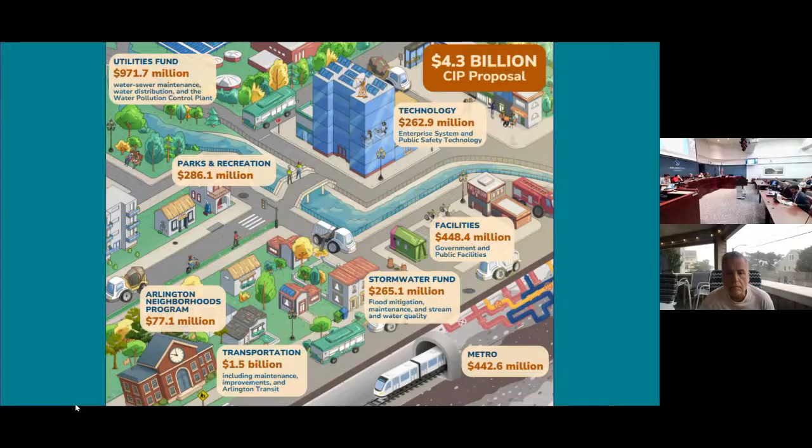We show this graphic just to highlight, it encapsulates all the various elements in the CIP, whether it's our water sewer to park and recreation to the neighborhoods program. This is the county CIP. Down on the lower left is the school, so it really captures all the main program funding areas.

So starting off with facilities, the county's real estate footprint includes 90 county buildings and over 2.4 million square feet, with about 1/3 of the buildings over 50 years old. So a lot of infrastructure to support and maintain, and keeping our buildings in good condition is paramount for the safety and comfort of our community and employees.

And of course, areas that you all are very involved in, some planning, whether that's on Langston Boulevard or Carlin Springs.

Next, we have transportation. The slide shows a snapshot of all the various things involved in transportation. The CIP provides resources to help us manage and maintain a safe, accessible, and reliable multimodal transportation system. The next slide shows the huge investment that the county makes in this area, totaling $1.5 billion, and that's excluding the metro commitments, which I'll highlight on the next slide.

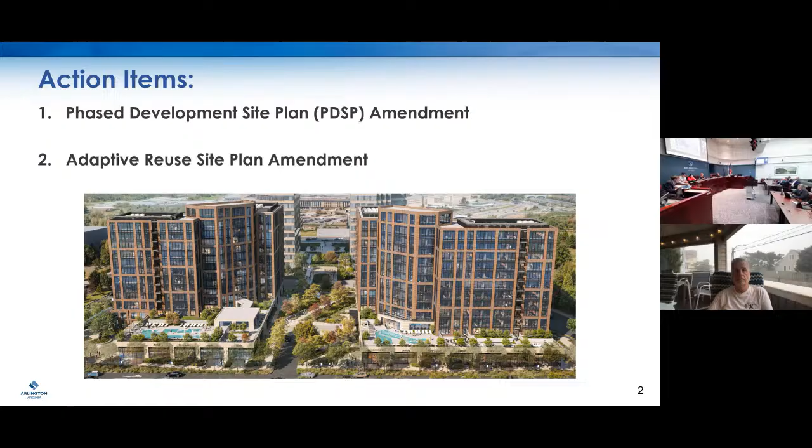I have 2 action items for you this evening. The first is a phased development site plan amendment, and the second is the adaptive reuse site plan to bring this development project forward. This site is at 601 and 701 12th Street South, just across the street from the Pentagon City Mall and the Pentagon City Metro Station to the south. This site is bounded by South Hayes Street, 12th Street, and Fern Street to the east.

The site today is comprised of 2 vacant 12-story office buildings constructed in the early 1980s. On the west side, or page left of the screen, is 701 12th Street South, and on the right side is 601 12th Street South. There were final site plans for each of those under the Pentagon City PDSP, also known as Pentagon City Block 1C. The zoning is C-O-2.5 Mixed Use Development District, and the GLUP is High Office Apartment Hotel, noting that we're in the Pentagon City Coordinated Redevelopment District, and there are no proposed GLUP or zoning changes with this project.

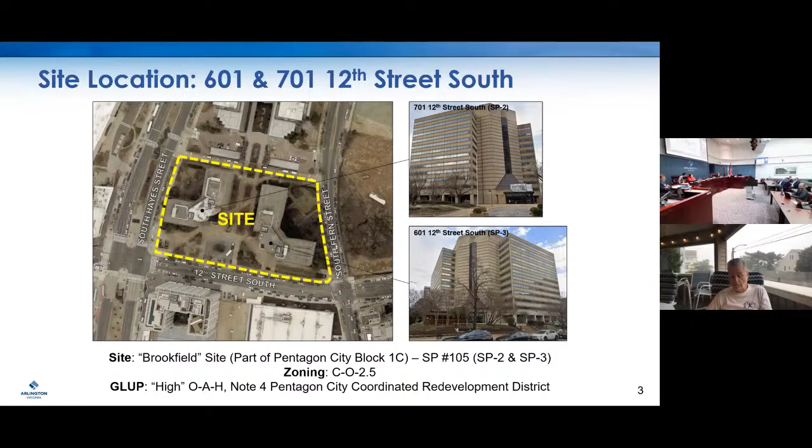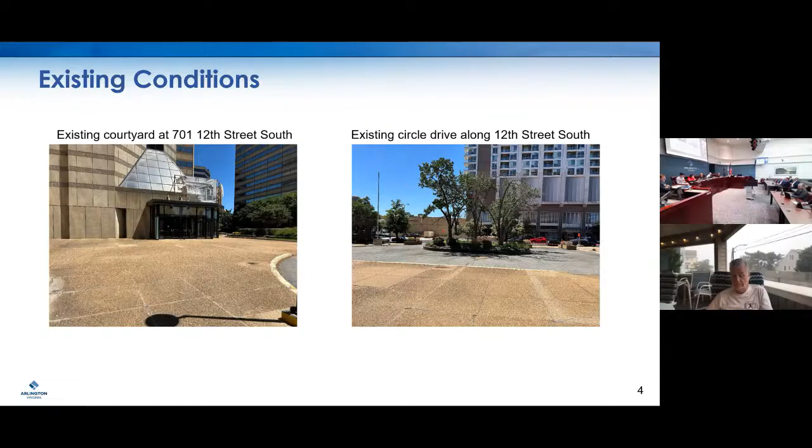Just 2 photographs of existing conditions from the ground today to keep in mind as we talk about this project. There's a lot of existing hardscape on this site today, surrounded by private courtyards and a large circular driveway fronting off of 12th Street South. One of the things I think will be very positive with this project is removing this - which I can tell you was very hot down there taking those pictures - and replacing it with retail fronting on 12th Street, increasing landscaping, and adding public access easements to make these spaces truly public.

So jumping into a little bit of policy guidance here - I will come back and refer to this as needed.

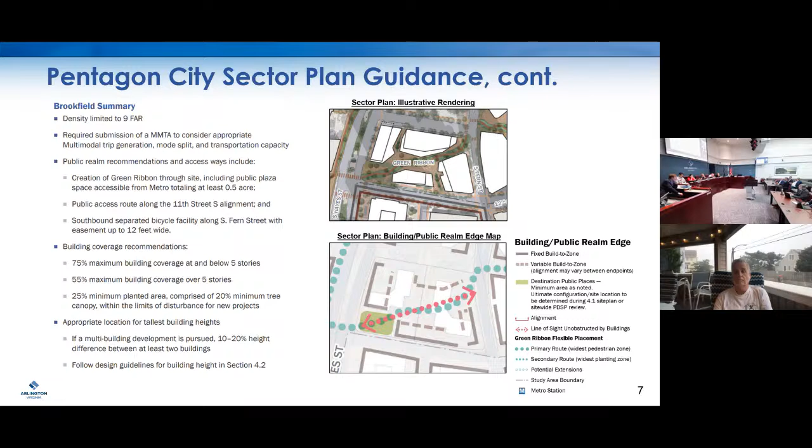I also would like to highlight our adaptive reuse policy, adopted by the board in 2024 in response to the declining commercial office sector in Arlington generally, and recognizing that chronically vacant office buildings have a negative impact on neighborhoods—whether that's the economics, the property values, or the public realm. Repurposing those vacant office buildings is a public priority.

Lastly, it recommends a streamlined review, which this project did go through. We had a lunch and learn meeting on May 28th, which was well attended, and we appreciate everybody for attending and providing feedback.

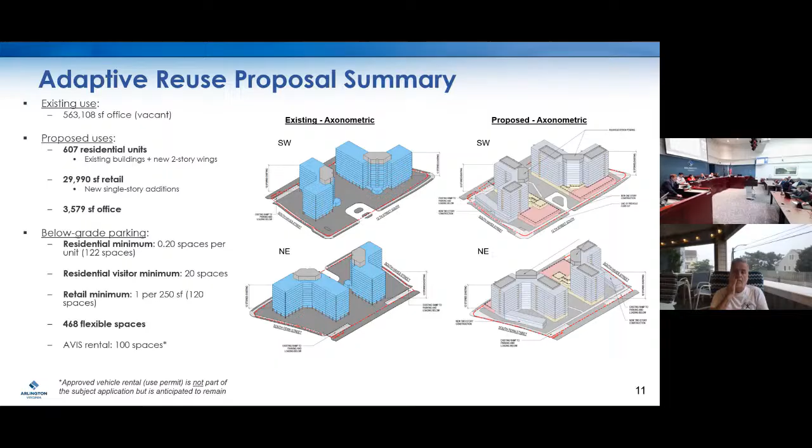Residential visitor spaces are also required, 20 spaces minimum, and retail spaces, 120 of those. The remainder of the garage is flexible use, essentially parking spaces we are not counting toward the required parking requirement. There's an Avis vehicular rental operation with an approved use permit by the county board that the applicant intends to continue operating there for the time being.

I'm Jeff Zell from Zell Partners. I'm the CEO and chairman of the firm, and we're doing this project with Lincoln Equities Group. Joel Bernstein is on the video, joining us from New York tonight. We're very proud to be here again. I've been in Crystal City doing most of Crystal City with Bob Smith over the years. I represented the family office and our own investments, which are over 14 buildings over there, including Crystal Houses. And it's kind of nice to come back and do a great project here.

We look forward to providing you with a very high quality transitional building here that I think will really set the corner. It's a very high-end building. We're removing the facade, as we'll explain, so you're going to get none of the issues with the windows that were described earlier. Arquitectonica is doing it, which has offices in Miami and New York City, but also an office here in Northern Virginia. So we're very pleased to have them on board. We think it's a great system, a great building.

We think we've given you a lot of park area. We try and listen. I will tell you, this has been the greatest collaboration between your staff and our company and all our different consultants that we bring with us, to provide you with what I think will be really a state-of-the-art transition of office to residential. So thank you for giving us the chance and opportunity, and I don't think we'll let you down.

Thank you, Jeff. Next slide. Madam Chair, if I could give a little color as a developer looks at the project, maybe give a deeper explanation on how we got to where we are. As Mr. Watson showed on that beauty shot of slide 4, it's pretty inhospitable today - it's a bunch of concrete 1980s buildings sitting around a sea of concrete.

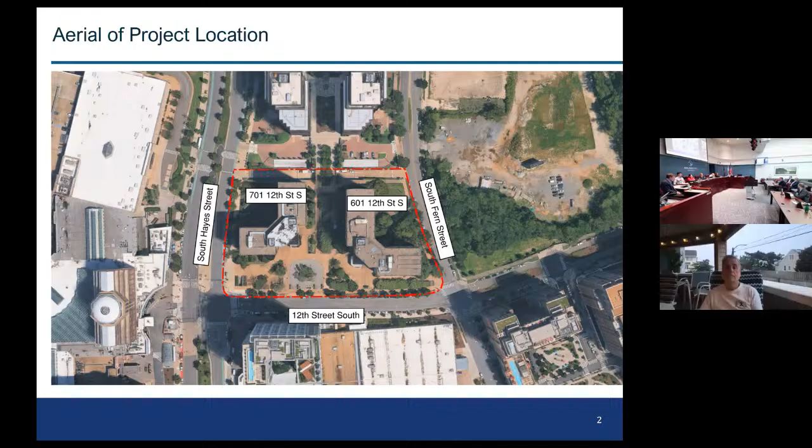Next slide. Jeff early on said, well, what can we do with the structure and the bones of this project? The good news is the core and thickness of this building is really an ideal conversion. When you get out of the hallway and open the door into the unit, it's just about the right depth for a residential unit. That made it structurally a very attractive project for both Zell and Lincoln Equities.

However, we still have the problem of the buildings being towers sitting in the middle of concrete. So early on, Jeff and his team said, well, we need some residential coupled with retail. You're seeing two approximately 15,000 square foot retail bays. Early on, our thought was to break up the open space - instead of having a half-acre park just on one side on Hayes, can we do two quarter-acre parks on both sides? That gives us a nice interaction and doesn't make a sort of primary and secondary. They're both equally proud buildings with strong amenities.

As you can see from the green here, while the entire site is covered with an 800-space underground garage, working with Oculus, we were able to couple the vision that the county has for the green ribbon with as much greenery and porosity as you can see through the site.

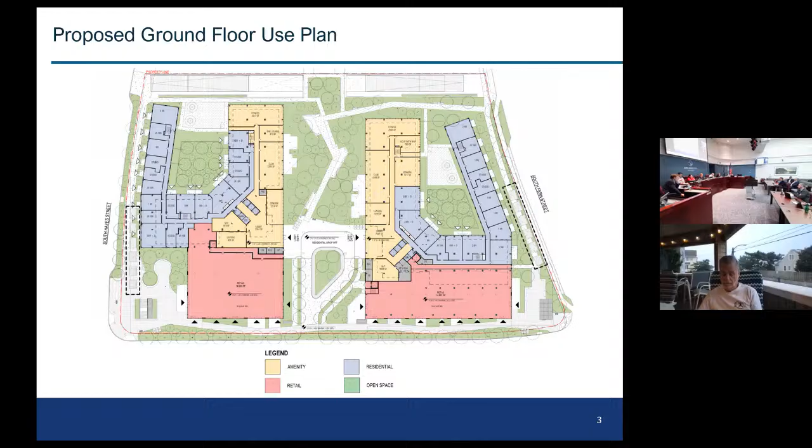I believe the next slide shows some of the public access easements through the site. What we're trying to convey here is there are 2 types of open spaces. For the community, the blue is you can go there whenever you want. That is a public access easement at the 2 parks on the eastern and western side, as well as a large central plaza in the middle of what was the green ribbon. I'm going to say it still is a green ribbon, it just zigs instead of zags.

Finally, the darker orange space, you shouldn't see a distinction between the 2, but it gets closer to the building than some of the building amenity spaces, clearly within the nooks of the 2 arms. On Fern and Hayes on the eastern side, the conversion ordinance allows up to 2 stories of additional square footage to be built on the project. This achieves a strong county goal, which is to bring the building out to the street face, so you don't have buildings on an island. You actually have doors on Hayes Street on the left-hand side.

The grade allows those units to walk straight out, which is great street activation. While we're not able to do that on Fern Street due to the grade, we are, as Mr. Watson mentioned, able to do the bike lane improvements along the entire frontage to begin building that bicycle network that the county's vision lays out.

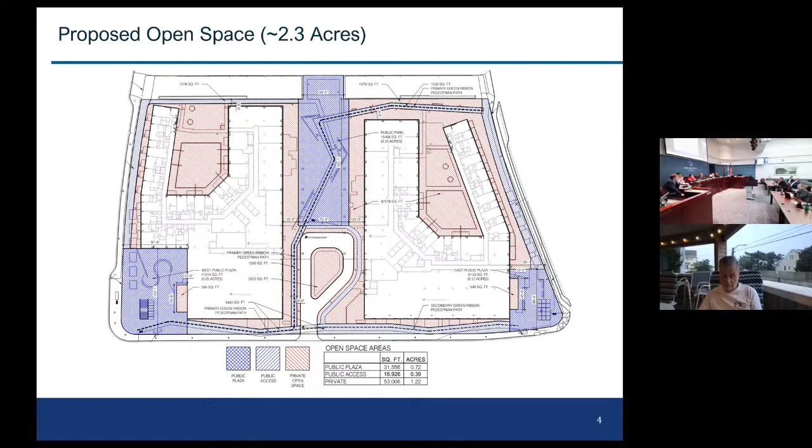These are some of the technical details, we can come back to that later, but it shows basically 35,000 square feet of proposed public access easements, in case there are any questions in the community about us not doing the best we can to get access through the site, and also along 11th Street at the northern end of the site. It's on a street because our entrances are there, but it does give that public porosity east and west along the northern edge of the property.

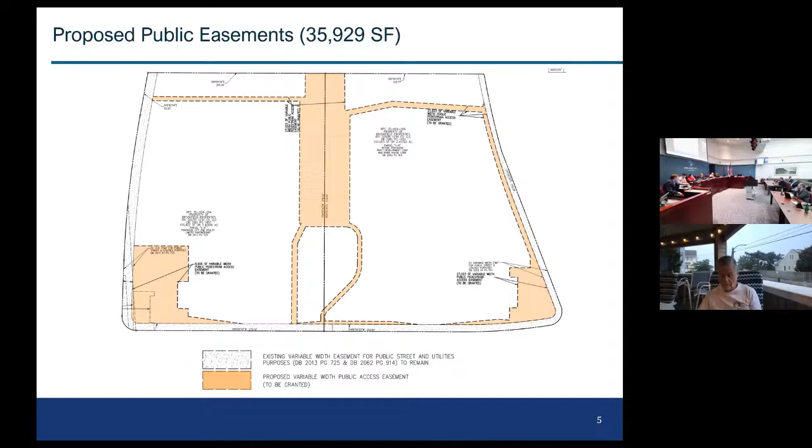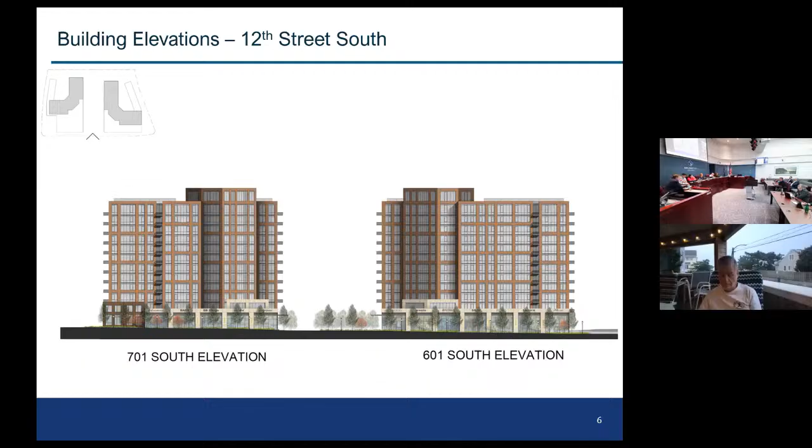These are some of the more technical elevations, but the best compliment I gave the architect early on is when I saw the elevations, it doesn't look like a conversion. And that's the best credit we can give to our team.

When we showed it to the community, they understood why the retail is on the south facing out. It enables us to have pool space on top and not compromise the public amenity space around the building, but gives that strong retail frontage on both the eastern and western corners of the building. You can see here we are heavily greening the site to the best extent we can, given the garage constraints and the right of ways around the building.

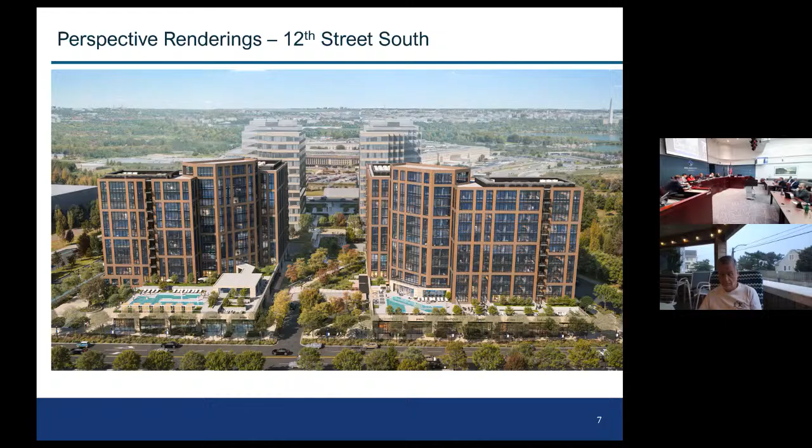This is a perspective to show how that two-story addition works on both the east and west side of the building. We're not meant to dominate the streetscape, but we are taking advantage of the zoning ordinance flexibility to add up to 2 stories of additional square footage. That helps amenitize the project and also differentiate the public versus private open space. We're consolidating the private open space between that 2-story arm and the elbow of the building, while focusing the public amenities in the green ribbon through the uninterrupted continuous space from 12th Street up to 11th Street.

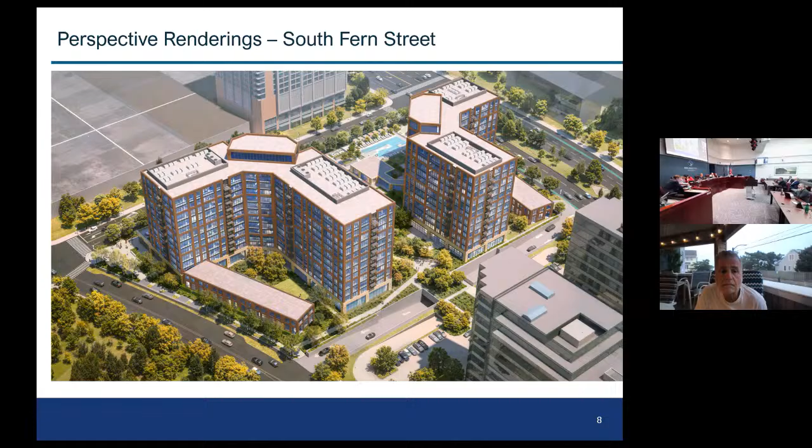Some of the details - I know this community was very concerned about how do we take this very hostile space and make it warm and inviting. So we worked on some of the elevations here. This is your green ribbon cutting through the center of the site, which shows a mix of heavy green space as well as hardscape to allow people of all abilities to transition the space and also stop periodically for rest.

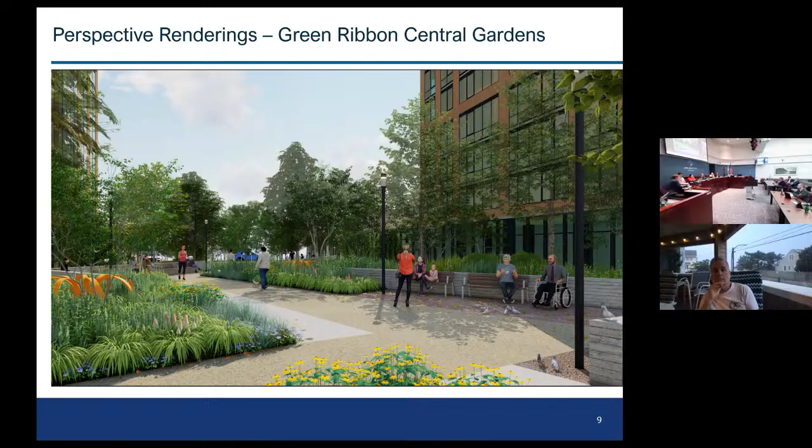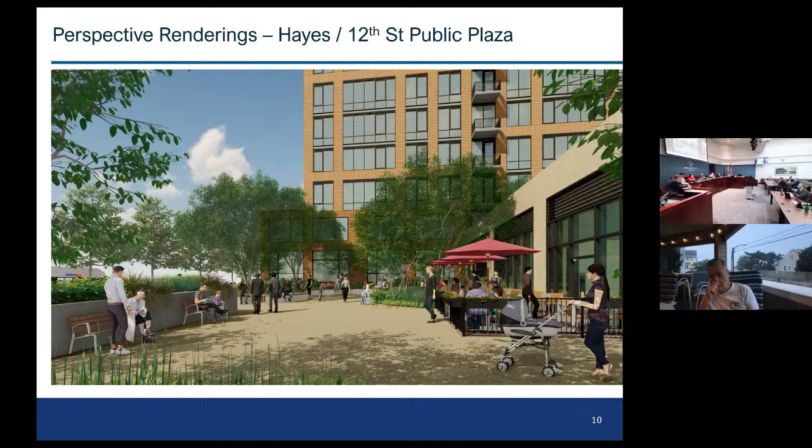This is a detail of the public plaza along Hayes and 12th Street, that corner public plaza. You can see the retail in the lighter color on the right-hand side with the umbrellas. That dining area is not counted as public open space, but it is an area that we all value, certainly when it's not 110 degrees outside, to be able to sit outside and dine and have that interaction between the public and private space being adjacent to one another.

So we're going to end here, Madam Chair. We are very pleased, very appreciative of Mr. Watson and Mr. Creed's dialogue. We called them with questions. You've only had 4 or 5 of these come in front of you, and there were always technical questions about what slides or what sheets. They were always available, our team was very responsive, so we're happy to be in front of you in a streamlined and efficient process. I'll pause there for any questions, but we look forward to your recommendation this evening.

Thank you. I know there were no commissions involved in this, but we were lucky that Commissioner Striner did represent us at the Lunch and Learn. I know he distributed his report, but would you like to make some comments?

Sure, yeah. A lot of it was covered here in the first 2 presentations, but the Lunch and Learn was very fun, actually I enjoyed that. It's a nice little casual lunch break activity. But again, a lot of the topics we covered were the green ribbon and sort of the intent versus the letter of the plans, a lot of pedestrian safety, transportation elements related, especially one related to the metro entrance, which is supported by the current plan.

And then one thing that I don't think will warrant discussion up here, but I think is worth mentioning, is that during our conversation, we had brought up the idea of potentially having a senior living facility come in. That was entertained during the Lunch and Learn meeting that we had at the time. But since then, if I'm remembering and understanding correctly, that is no longer on the table. The applicant is not pursuing that and it's not relevant to this site at this stage, correct?

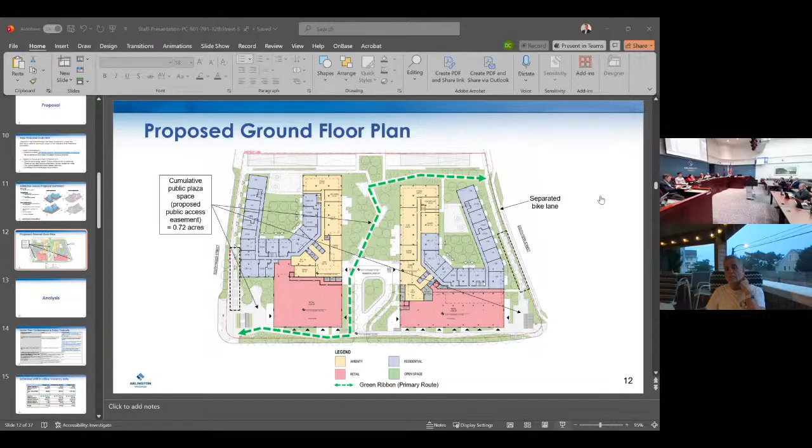It seems as though there would have been an opportunity there to have the green ribbon be a little larger and then flow through the property. It seems a bit of an unnatural way, and obviously very close to that circle drive. So if you could speak to that, I would appreciate it.

I guess I could start by answering the policy related stuff about the green ribbon. In terms of the design guidelines in the sector plan, yes, landscaping on both sides of the path, width is 8 to 12 feet wide. The long story short is that the path design is complying, and the planting zones are both complying with what's in the Pentagon City sector plan.

In terms of having a little bit larger public space down at the southwest corner, that was something we heard at the lunch and learn. That's something we asked the applicant to consider. Of course, there's a trade-off there between having more retail at that corner versus more usable public space versus breaking that space up across the block. Again, we see what's in the sector plan, we make that recommendation to the applicant. This being adaptive reuse, it's up to them to decide if they want to move forward with that or not. So I might let them speak more about the decision to go with the retail, and also about feasibility of running the green ribbon through existing buildings.

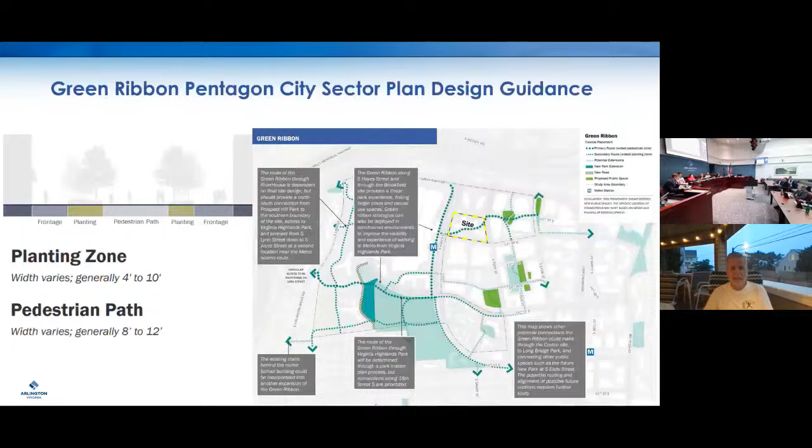Clearly it's staying, which is great. Right now its hours are limited to weekdays 7 to 6, which works for office buildings. But this is now going to be residential, meaning people will be coming and going effectively 24 hours, 7 days a week. Is there a way we can keep this entrance open the way the entrance across the street owned by Metro is open all the time? Or at least open as long as Metro's open, not 24/7 since Metro doesn't run that. Do you have an answer for that?

Yes, Commissioner Lantelmi, thank you for raising that. We actually have a condition speaking to this in particular—your desire for it to essentially mirror operations 1 hour beyond station operations at Pentagon City Metro Station. I'll say there's an existing easement here that governs the hours of Monday through Friday, 7 a.m. to 6 p.m. I'll also say that between Zell and staff, there are other parties to this easement as well.

So what we're asking is to continue to work with Zell and have them coordinate with the other parties to this easement to try to amend it to effectuate that change, exactly as you said, Commissioner Lantelmi.

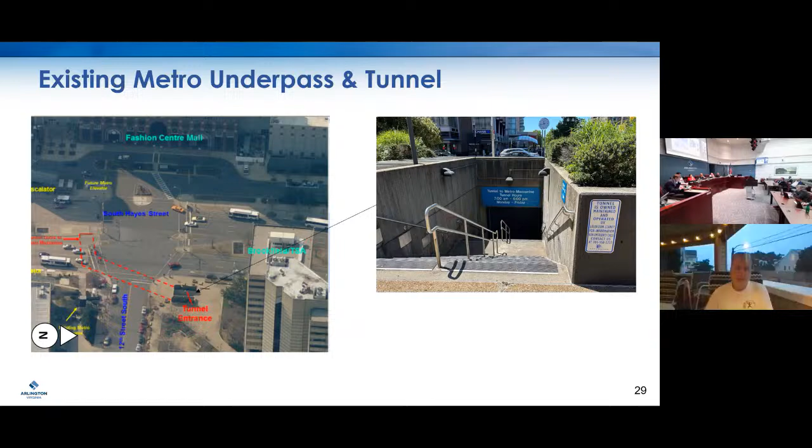Second question for both staff and the applicant. On the north side, where we have the garage entrances, the Pentagon City Plan hoped for a street going across there, and I understand why we can't do that. I don't have a concern with that. But if the DEA site north of that redevelops, which everybody hopes it will, would that give opportunity to put a street in, or at least widen and make a more robust pedestrian path going across from Hayes to Fern?

As Mr. Watson previously mentioned, the 11th Street extension was envisioned to come in with both the DEA property to the north and this site. As proposed, it's not going to meet that — it'll be one of the trade-offs we discussed. Whether that could happen on its own with just the DEA site, I can't speak to, but it was envisioned to be both sites together to have the effective width for that extension. But I will mention that the applicant is providing pedestrian access through there with the public access easement, so you'll still be able to go through the site east to west through that pedestrian easement.

And I would just add, Commissioner Lantelmi, I think that's still the recommendation of the sector plan. So if and when the site to the north does come into redevelopment, that will obviously be looked at again to see what could be done there. Okay, great, that's good to know.

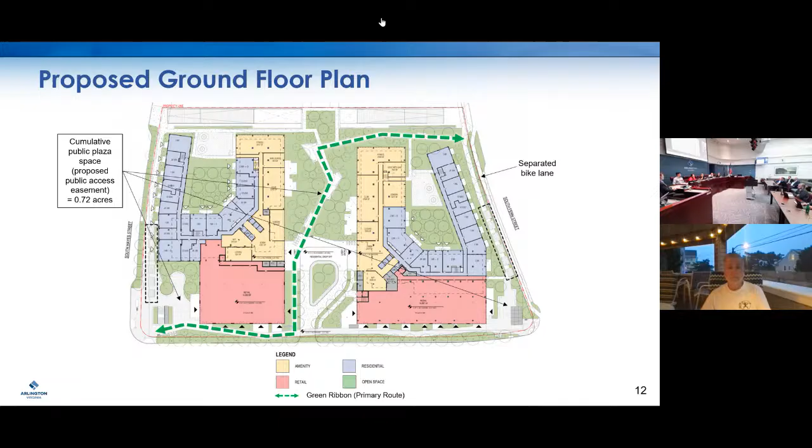I'm sure you guys heard the discussion earlier about requirements. I know there's no sustainability requirement and no requirement for affordable housing, but was that ever a consideration — potentially putting some affordable units, whether on-site or providing to the AHIF fund? I understand this is extra credit bonus, but I figured it wouldn't hurt to ask and see if perhaps in the future this is something that could be considered. And if so, how do we have the conversation, staff with developers, to develop policy that perhaps reflects that? Sure, great question.

As a former chairman of the board of NAIOP, we appreciate the conversation about how to make the good trade-off. In today's shifting marketplace, there's a structural change, so developers buy and sell land based upon your policies. Conversions by their nature are tricky. That's why the exemption makes a cleaner pathway to get entitlement. In today's market, when you have the money and the desire and the pathway is clear, that's why this project is a go. Unfortunately, we did not incorporate affordable housing or green building because that wasn't asked of us, and that's how we priced the land.

That doesn't mean future conversations couldn't give more flexibility as a trade-off. As staff mentioned, there's always a trade-off somewhere, but on this site, with all the green building, the green space, the intricacies of the site, the metro access, and Fern Street, we put all of our extra dollars of R&D into the project on the ground plane.

But I certainly look forward to continuing the conversation on how that dynamic may change. Thank you, I really appreciate that. It's such a huge improvement from where it is, but I just want staff to take this back, that if perhaps we outline something, there could be a conversation with other developers in the future.

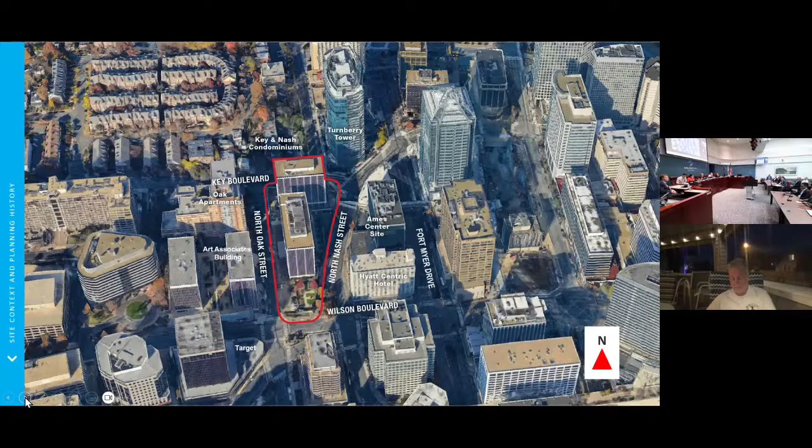If we can go to the next slide, and we can actually probably skip over this one. As Mr. Lamb mentioned, back in 2014, Monday received approval for a redevelopment proposal to have a twin tower project. One was an office building, one was a residential building with a 44,000 square foot ground floor grocer that fronted on Key Boulevard. Construction of that project has not commenced, primarily due to market conditions and especially the realities in a post-pandemic environment. But we spent a lot of time carefully studying it, discussions with our design team, and have finally landed on a proposal that's before you tonight that we believe finally realizes the longstanding vision of the Rosslyn sector plan. So we're very excited about it.

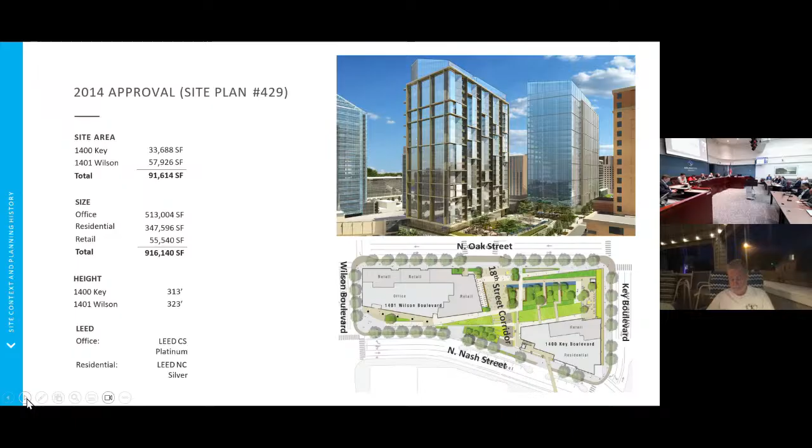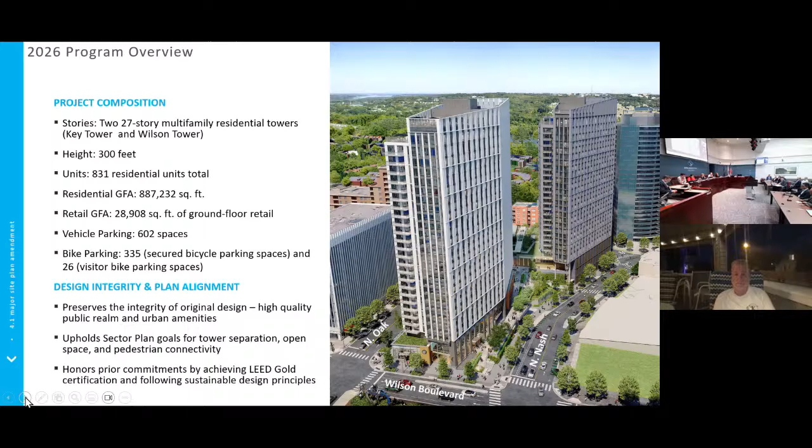Next slide. And in order to ensure the viability of a future grocery store and to do everything we can to attract a grocer, we have shifted the grocery store from the previously approved less visible location along Key Boulevard up to the 18th Street corridor, which not only provides direct visibility to Wilson Boulevard, but will anchor the grocery store and center it at the confluence of our key pedestrian and vehicular connection at Oak Street and the 18th Street corridor, and will also encourage casual uses and activation of that corridor.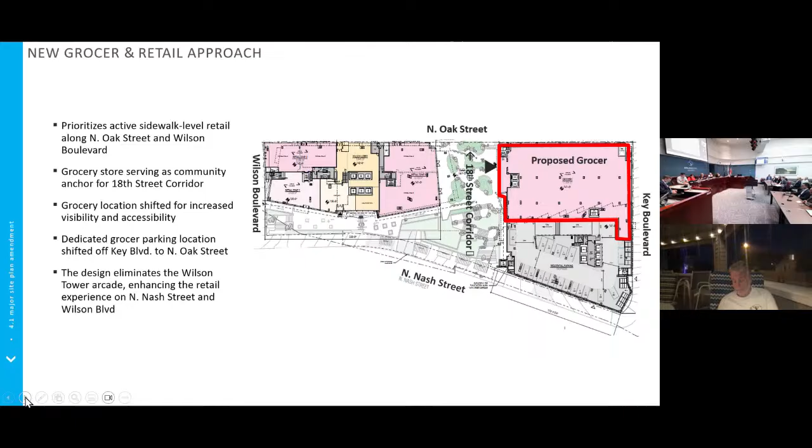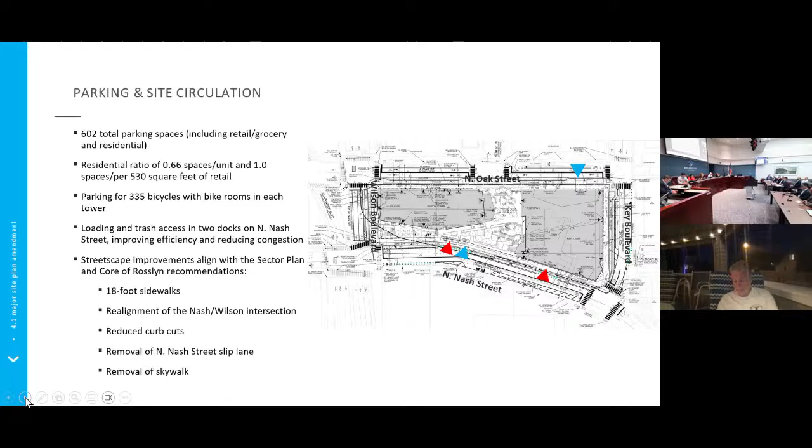Next slide. This is just parking and on-site circulation, which we can talk about next. But in the interest of time, I'd like to go to my last slide, and then I'm going to turn it over to Shalom Baranis, who is our project architect.

The brainchild of this 18th Street corridor is really that of Parker Rodriguez, Craig McClure, and Rachel Rittler here. This proposal improves upon the prior approval's open space elements. Overall, we have approximately 52% open space, which is quite unique for a Rosslyn sector plan project. And when you take out our building footprints, it's about 42% open space.

Pretty remarkable. With respect to the 18th Street corridor, we spent substantial time working with staff on this. It is a wider plaza area. Its elements reflect a fresh approach to placemaking. It preserves the mid-block crossings at both ends, and it improves upon accessibility around the site for people of all abilities, including preservation of the elevator along North Nash Street.

Self-generated programming was an emphasis of this project. We want to have this be something that just naturally anchors the site and naturally attracts people. And I think we've done that here.

The monumental staircase, which you can see here, is a far more gracious, winding monumental staircase that is punctuated by generous intermediate landscaped open spaces and places for people to dwell. And I think Mr. Schwartz, who attended the SPRC, mentioned during the second SPRC that this can be a flagship for Central Rosslyn, kind of a Grace and Riva that you see down in Crystal City, but one that is punctuated by more green space here in Rosslyn. So we're very excited about that. It celebrates the hillside escarpment, and I think will be nothing short of spectacular.

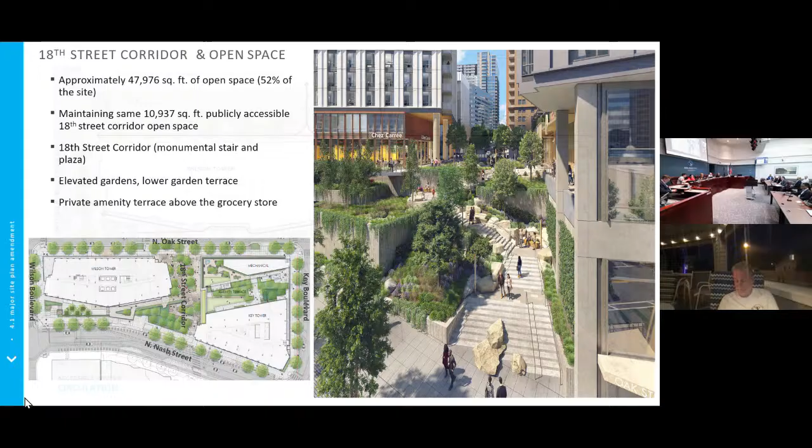Next slide. These two slides here, I know I said I was going to be wrapping up. I just wanted to show these. They show we moved from a very angular, rectangular, linear way of having people navigate the site to one that is more interpretive, but yet intuitive. But we show access in and around the site from all corners.

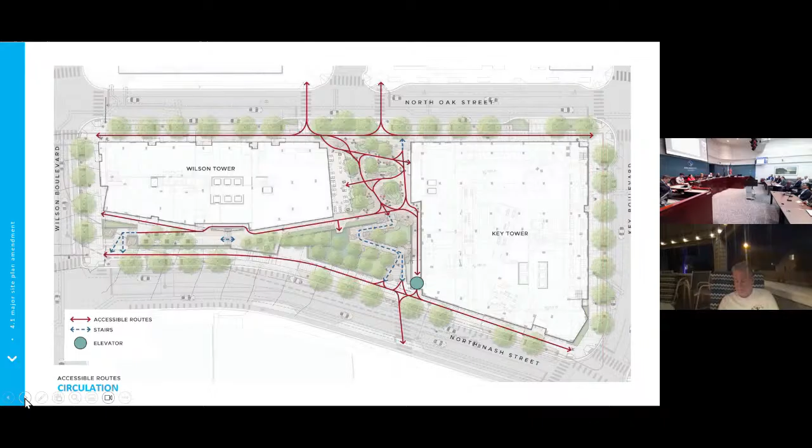Next slide. And then by skinnying up the Wilson Tower, we were able to recapture additional open space along North Nash Street, which we have dedicated back to the public realm in terms of things like bioretention facilities, overlooks, planters, and seating areas. So I'm going to pause here.

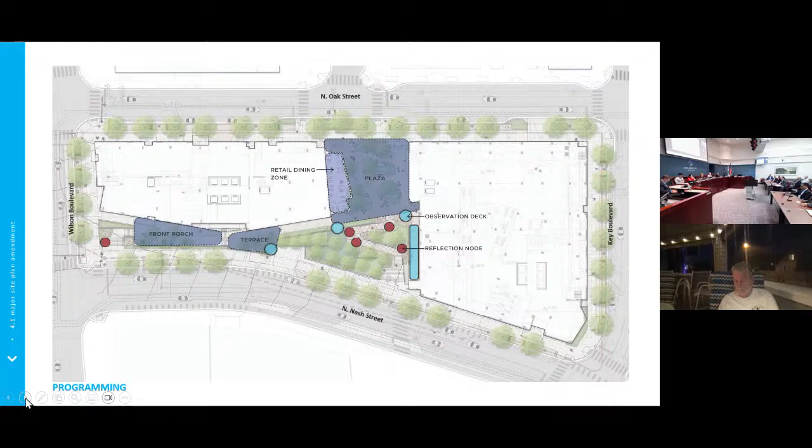I'm going to turn the rest of the presentation over to Shalom to walk around the site. Thank you, Andrew. We're very fortunate here to have a full city block to work with, surrounded by 4 streets. And because of that, we developed a design strategy which focused on minimizing the footprints of the 2 towers. And of course, that allowed us to maximize the open space on the site. Our design strategy involved very carefully managing the setbacks, the floor to floors, and making the towers as compact as possible in order to really improve the public realm. Next, please.

By having so much open space on the site, we were able to shift the towers to locations which really allowed for the best use of the site for publicly accessible space. So here, for example, we're at the corner of Wilson and Nash here, looking north. You'll see that along Nash Street there, we took one of our towers and developed its primary facade, west facade, so that it's right on along the sidewalk on Oak Street, and that you'll see shortly that created a very nice continuous line of retail, and that gave us the ability to create a very nice open landscape space along Nash Street. This has parallel walkways for the public. One is up along the building, which takes you at a higher elevation from this corner up to the plaza in the center of the site. And then the other one follows the sidewalk roughly 40 feet down to Nash Street, to the Key Street, Key Boulevard elevation. Next, please.

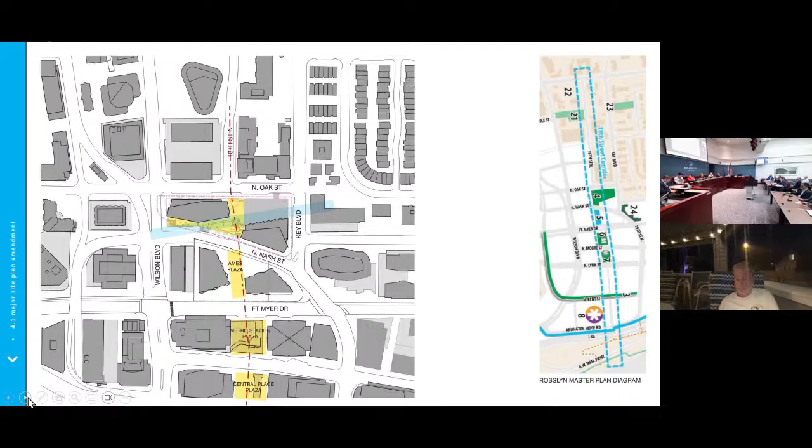And Andrew mentioned the 18th Street corridor. You see this image on the right from the sector plan. On the left, you can see that we placed our plaza, our primary plaza, right on axis with that in order to open up our site both to the east and the west. Next, please.

On the left there, we're standing on Nash Street, looking west. One of the key things we were able to do here was to actually increase the open space, or the space between our two towers, from what we had in our original submittal. We are over 60 feet between the two buildings, and you can actually see the sky and the horizon as you look west. Next slide, please.

Looking in the opposite direction, here we are looking east. We're standing at Oak Street. We're looking through our plaza, and between the two buildings here, again, you can see the horizon, you can see the sky. In the foreground there, we are looking at our plaza, which is lined with retail, both on the north side and the south side. And of course, that is separated by a long green area that has a series of individual seating areas, which are landscaped, provide shade, provide seating, and will be accessible to the public. Next, please.

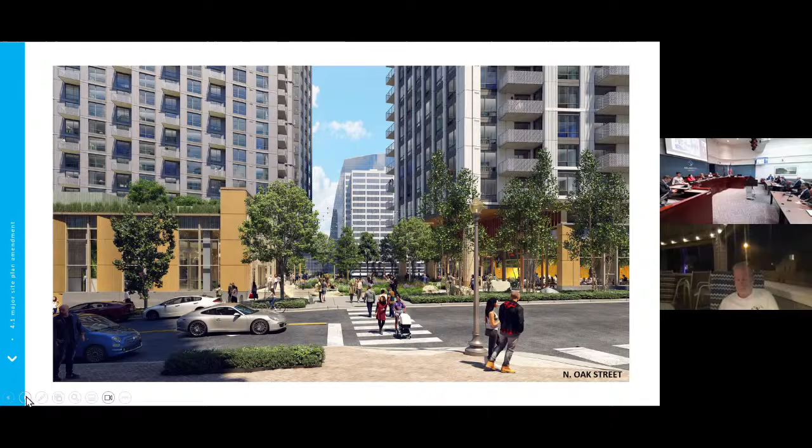In this particular image, we removed the trees so you could see that the retail continues from both Oak and Nash to this elevation, facing the plaza. We have the opportunity here to put in a restaurant or cafe with outdoor seating, which will be undercover under the soffit, directly adjacent to the landscaped areas.

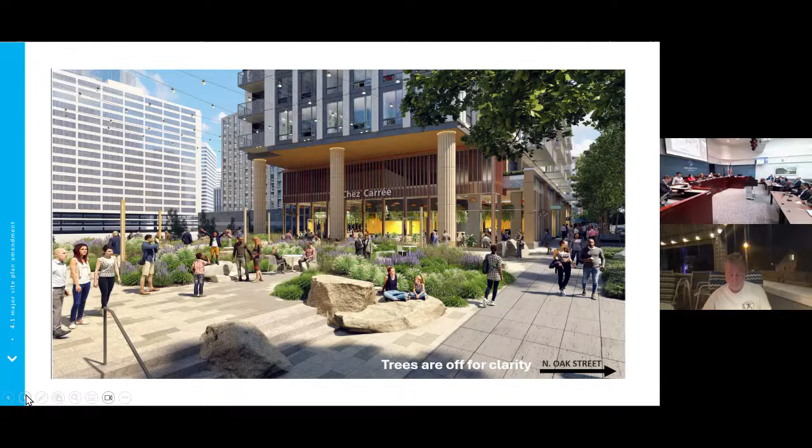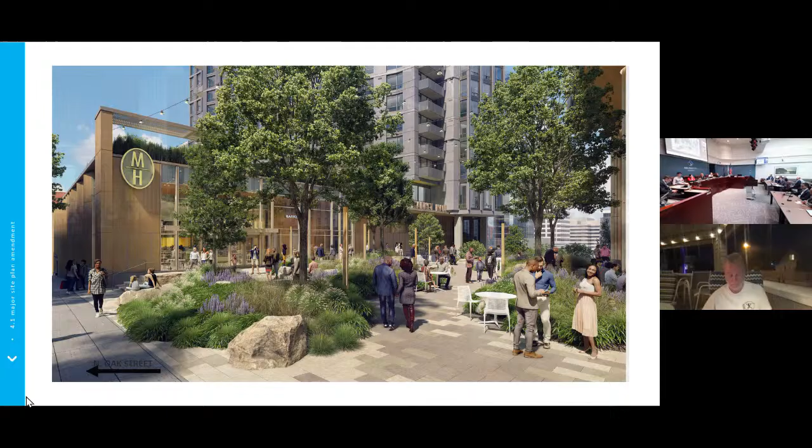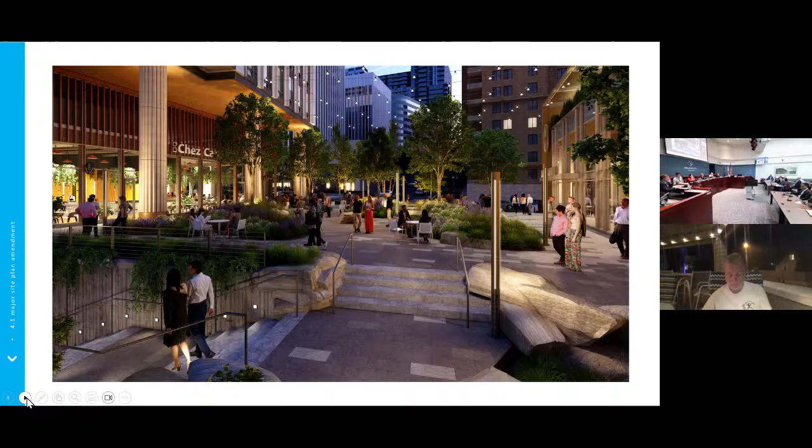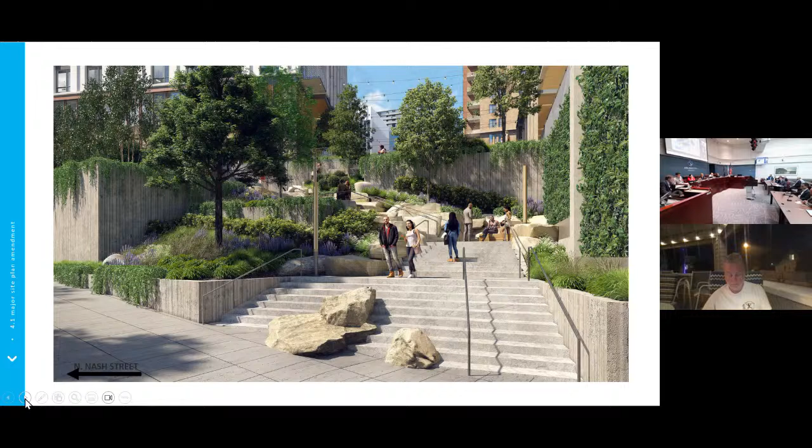All right, this is the elevation of the grocery store facing the plaza. We have connectivity between the open space. This is a view of the plaza at night. We intend to develop this so it can be used 24 hours a day. Next, from Nash Street you can get up to this plaza by going up this beautiful set of stairs designed by our landscape architect, with a series of landscape terraces which make the whole journey very exciting.

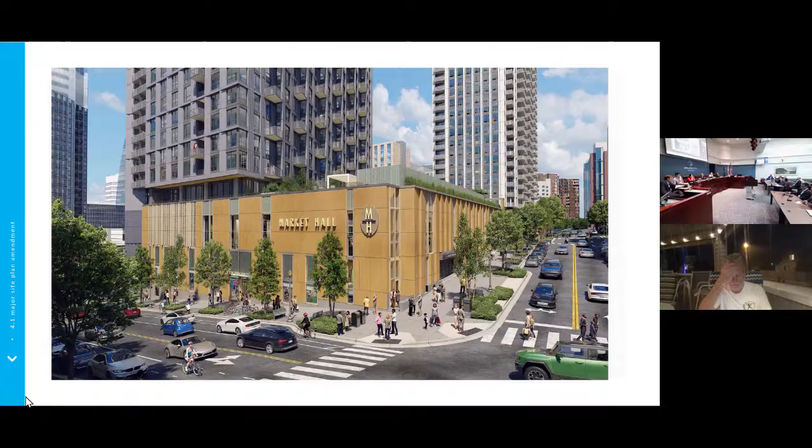It's also accessible with an elevator. On the north side of the site, we gave the grocery store an identity by pulling it out of the ground where it was before, and we activated both elevations with windows. Here we are at the corner of Wilson and Oak. The retail continues around, wraps all the way to Nash.

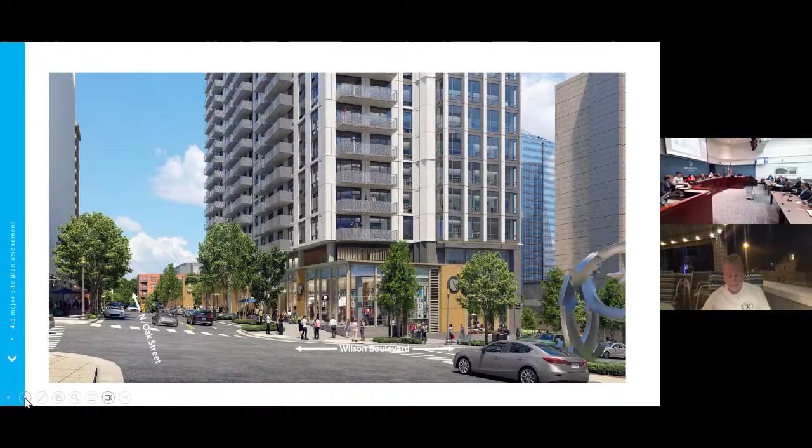And finally, we developed the two towers to be distinct from each other but clearly related. The materials are different, the colors are different, the detailing is different, and you can see they have a very strong vertical emphasis. Next, and this is the final image we have.

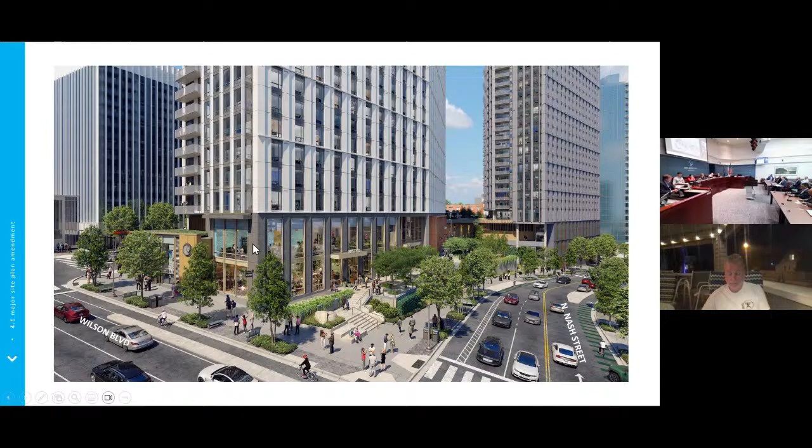Again, I want to emphasize that what we've been able to do is create several alternative passageways for the public to get through the site, and we've combined all of that with very rich landscaping throughout the site. The next slide just addresses sustainability, which I'll be happy to answer questions about, and then we have community benefits also listed after this one. Madam Chair, thank you very much for your indulgence.